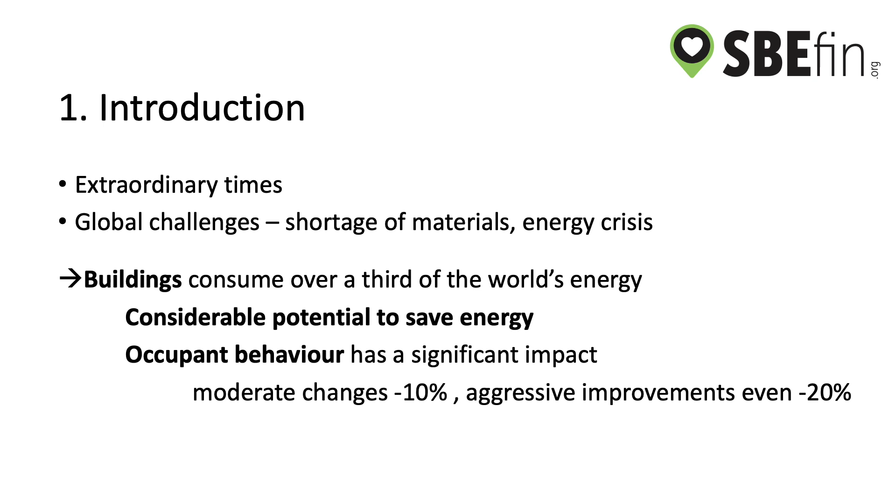This paper shows one example from Finland. It's also occupant behavior that has significant impact. There is up to 10% saving potential with moderate changes, and with aggressive improvements even 20%.

The factory building from Abloy is located in Joensuu region, that is in subarctic or continental climate. There are 680 employees in the building, working mainly in 2 production lines. One is for the lock factory and another for the closer factory. Building is constructed in 1968 and has gone through many renovations.

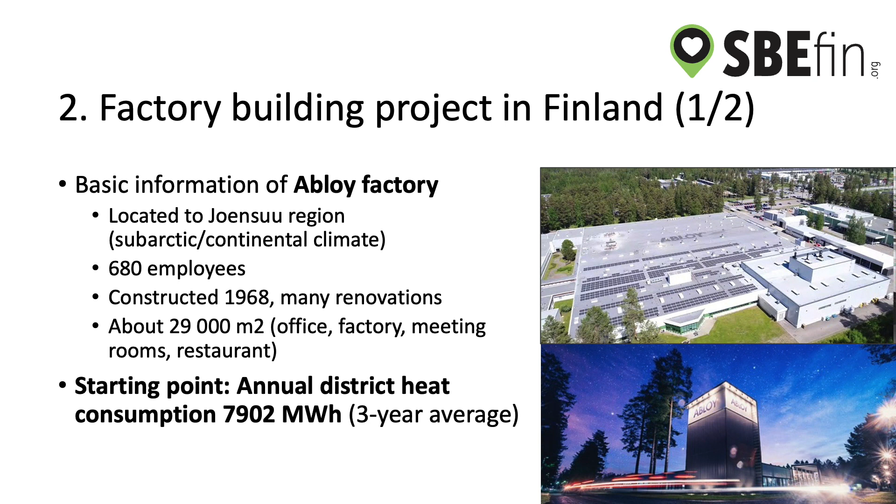The size is huge, almost 30,000 square meters, with spaces including office, factory, meeting rooms and restaurant. There is great saving potential with energy. The starting point in annual district heating consumption is almost 8,000 megawatt hours in 3-year average.

Sustainability is important for the factory owner Abloy. They are using ISO 50001 energy management system and during the recent 10 years aiming also for carbon neutral energy. On the diagram at the right bottom, the impacts of this change mean that greenhouse gas emissions have decreased 99% since 2012. The company has also improved processes.

For example, in production lines, new LED lighting saves electricity. There is also water saving. Few years ago, over 500 solar panels were added to the roof, producing almost 150 megawatt hours in a year. And this way, the energy consumption per product ton has been reducing over 10%.

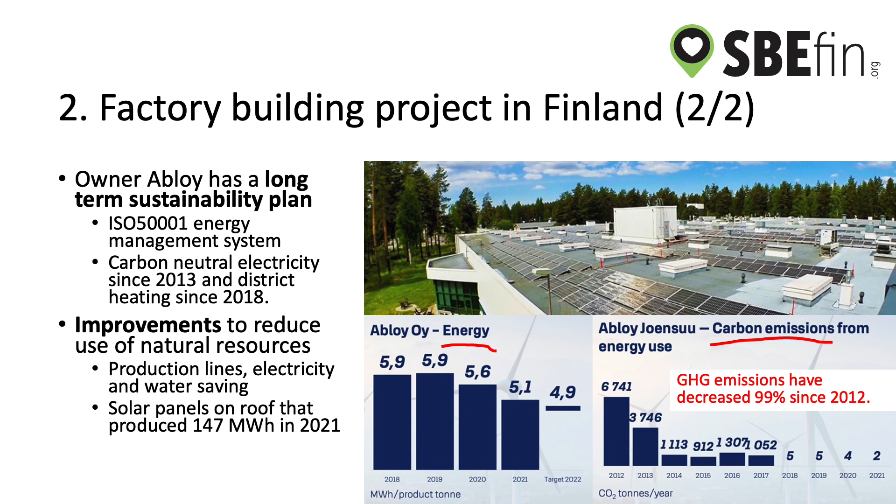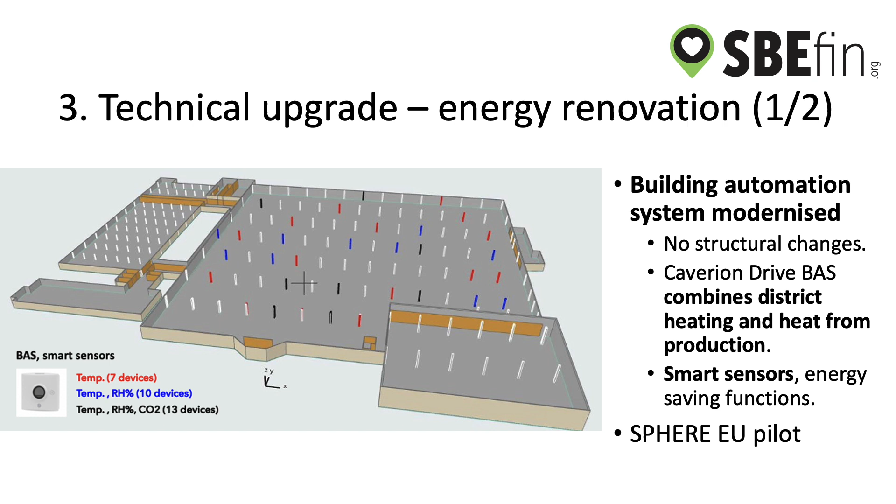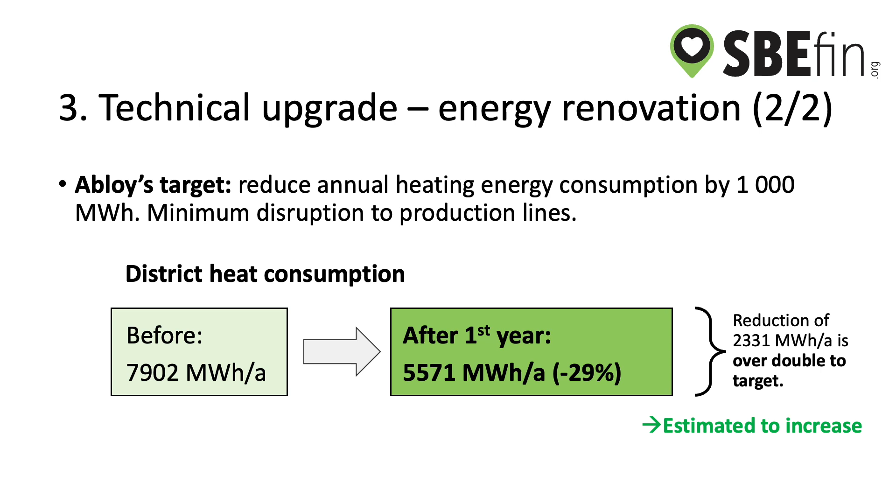The target for the project was the reduction of energy consumption for heating by 1000 megawatt hours, since the factory building is in use, with minimum disruption to the production lines. The project succeeded well. The results indicate that after first year, the energy consumption for heating was 5571 megawatt hours, 29% less than earlier, meaning a reduction that was over double the target. And this is also estimated to increase. 2 production lines were not operated full year. The reduction will be almost 40%.

Another result in the project was thermal conditions and well-being. The aim is to create tolerable working conditions for employees. Heating has to be balanced during the winter and summer periods. In Finland, the weather conditions have extremes during the year. In the winter time there may be even minus 20 degrees, and during the summertime over plus 30 degrees.

One of the tools utilized in the SPHERE EU project is human thermal model, used for monitoring how different individuals are experiencing thermal comfort. The optimal temperature between different people may be even 6 degrees different, depending, for example, on gender, body compositions, varied heights, different weights, different level of fitness, and amount of muscles.

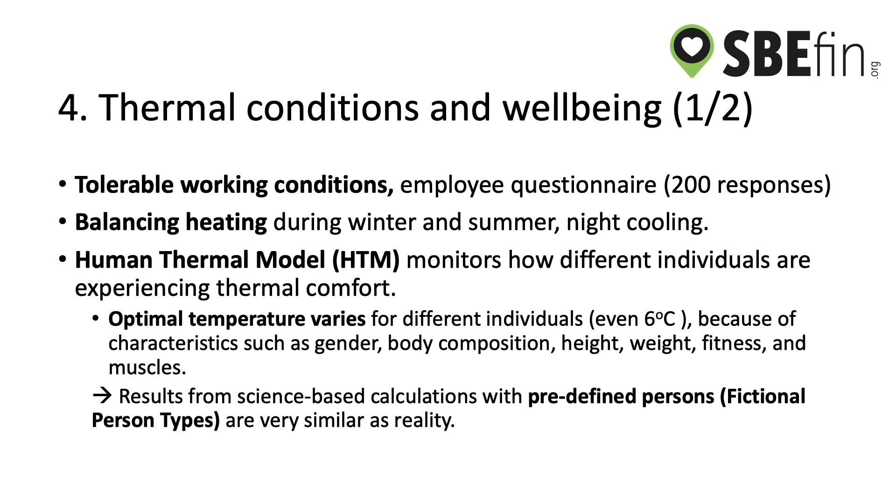In the calculations, predefined science-based person values are used instead of the reality. These fictional person types indicate reality very well. And also, there is no need to ask permission from the employees. In user interface, the space and person type are selected from the top left, and on the top right there is time period for the simulation.

Well-being is described with thermal sensation index. The number close to 0 means neutral conditions. When the number goes to +3, the conditions are very hot, and with -3 very cold. In factory setup, the productivity of employees is usually better in slightly cool conditions.

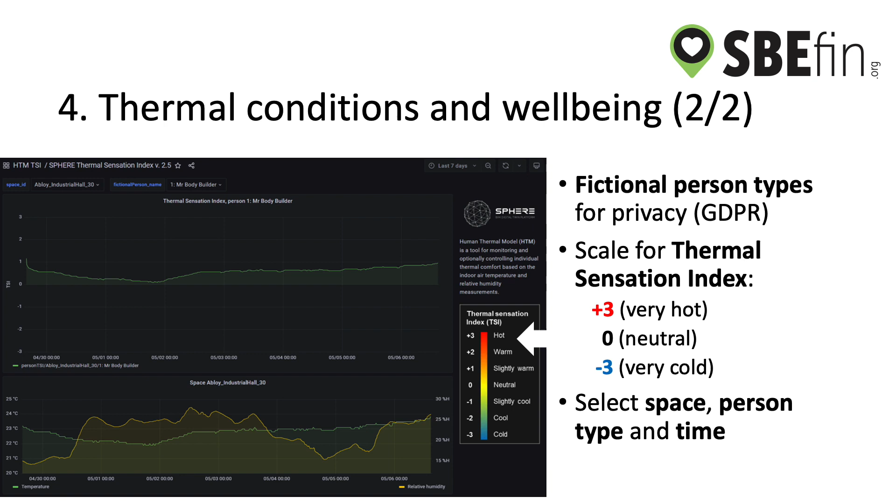The work shows how committed owner Abloy is on long-term sustainability. The positive results from technical upgrade by Caverion have already shown a reduction, -29% in heating energy consumption. The target was exceeded, and with human thermal model, the owner is also capable to monitor thermal conditions from employee perspective. To conclude, we have presented here that there is great energy saving potential in large and complex factory buildings, and therefore they can provide better impacts globally.

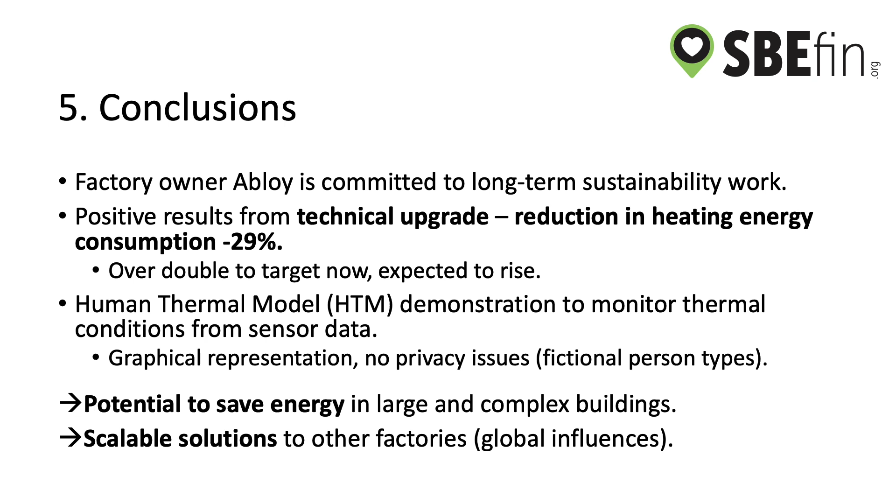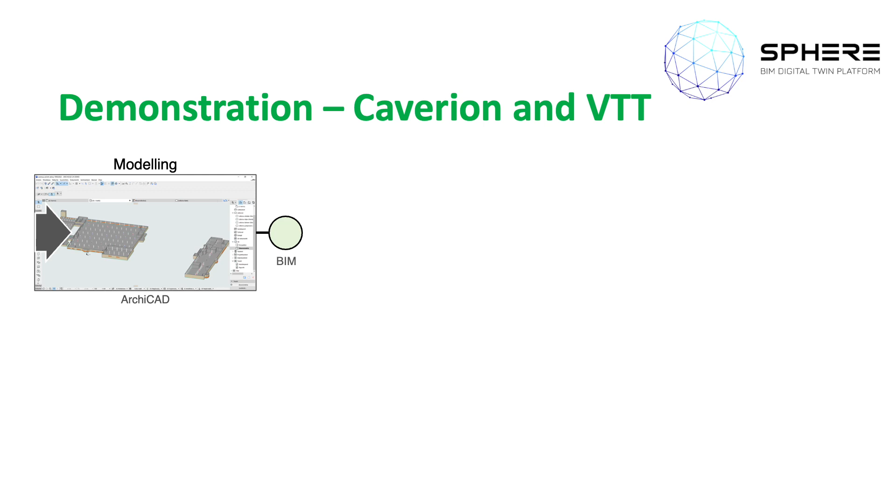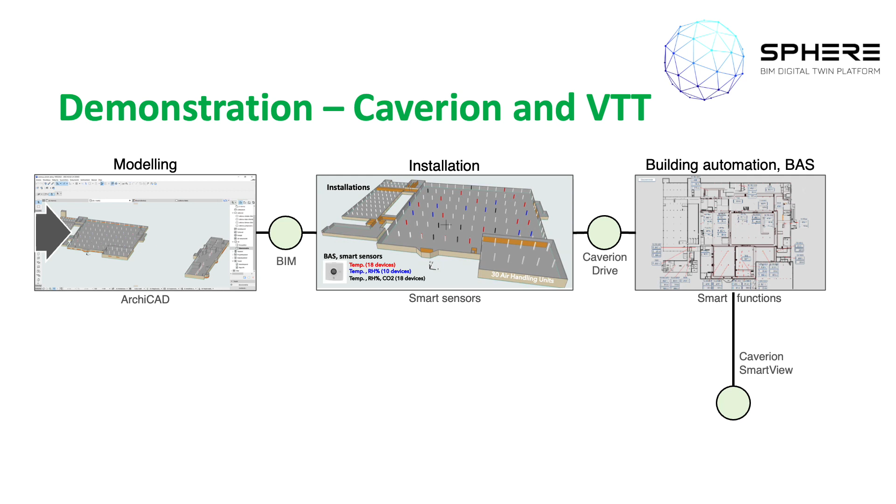In the end, we show demonstration from SPHERE EU project from Caverion and VTT. Building was modeled with ArchiCAD. The BIM model was used for the installation of the smart sensors that were connected to Caverion Drive building automation system to create smart functions. Through Caverion Smart View, the integration was done to VTT research platform to host pilot data in the SPHERE EU project. An API was built for digital twin for human thermal model. Results show remarkable energy savings and tool to monitor thermal well-being of the employees.

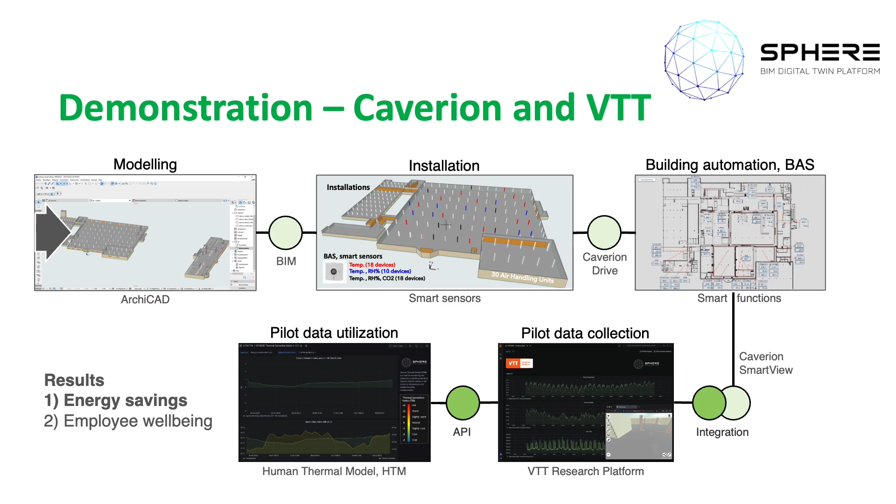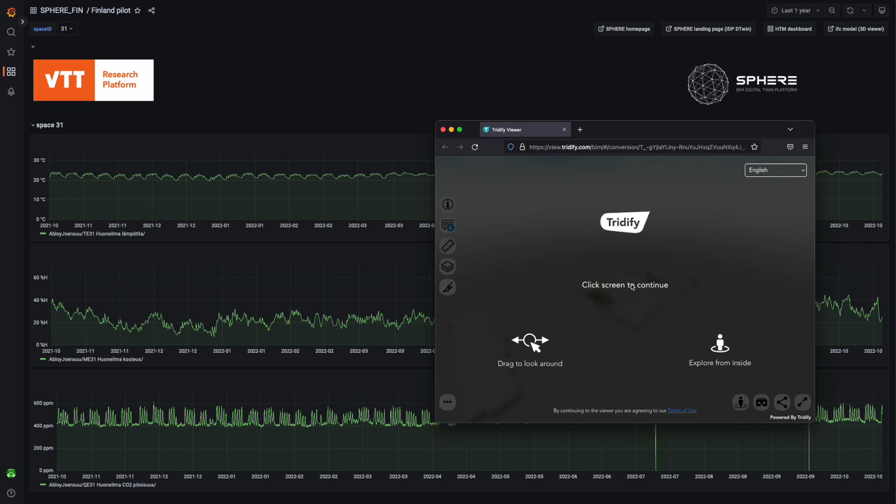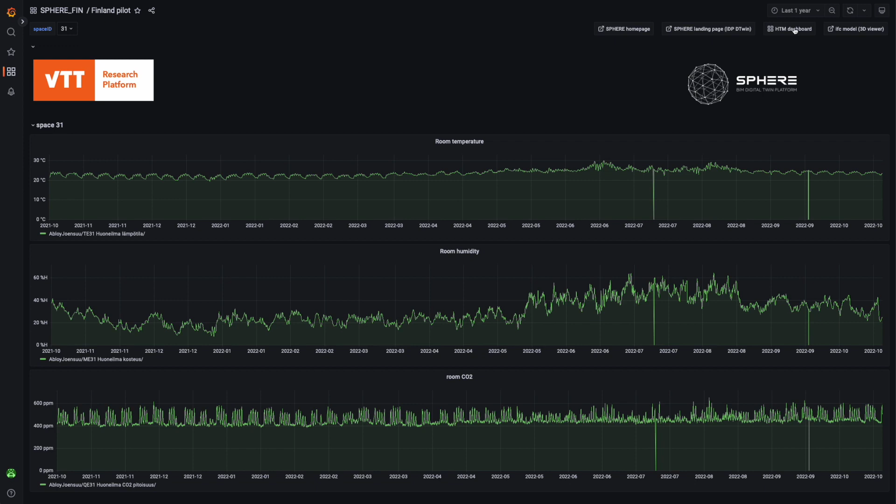Building data comes from Caverion Drive building automation system to VTT research platform. Dashboard shows graphically the data for 1 year on room temperature, relative humidity and CO2 emissions. There is also an integrated viewer to see inside the building. On top right, there are shortcuts to different tools to access human thermal model. When it opens, the last week data is available for viewing. Different data points from sensors are in a drop-down menu.

Another drop-down menu is for the selection of fictional person types. In this case, I'm selecting man and woman and see their thermal comfort. As we can see, in same thermal conditions, male usually feels warm, while woman is feeling a bit cooler.

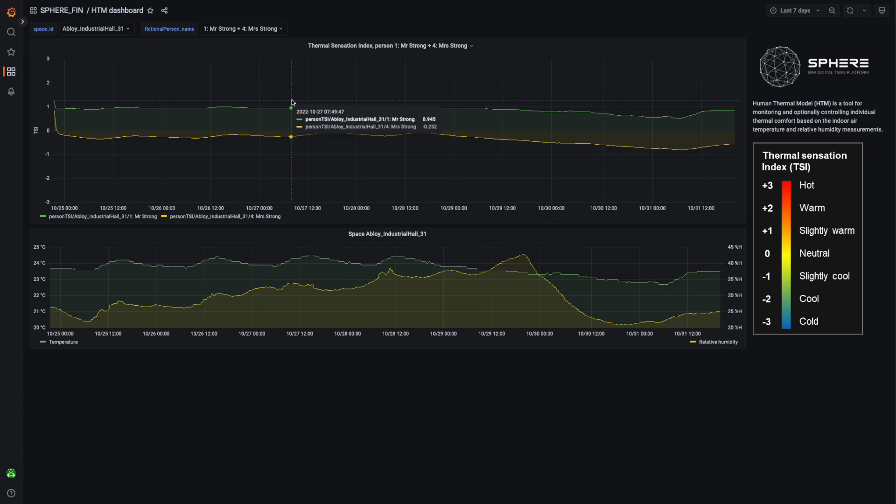The work presented from the factory building in Finland is one of the 4 case studies in the SPHERE EU project. The project aims to have an ecosystem where 3 core services are connecting 16 different tools together to gain various benefits.